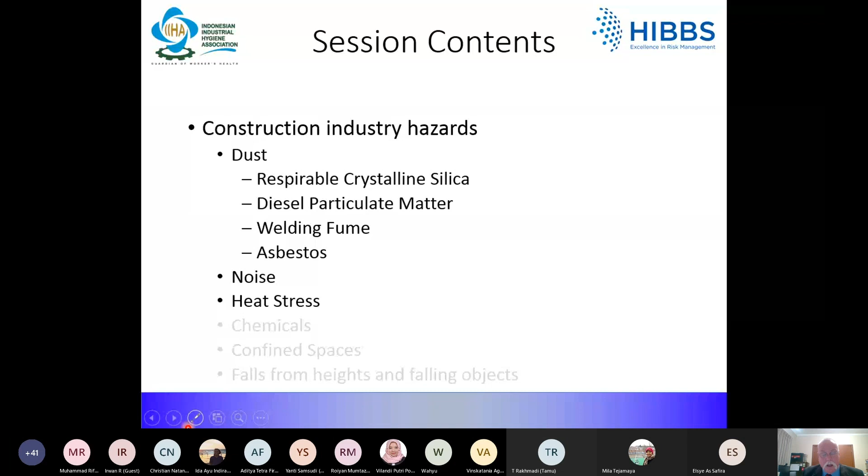So what does the construction industry include? Well, generally we think of building things: standalone houses, residential apartment blocks, commercial buildings, things like multi-storey high-rise blocks, hospitals and schools, or warehousing, or maybe industrial complexes, infrastructure developments, so that's roads and rail networks, bridges and the like.

However, increasingly in our developed cities, before new construction projects can commence, older existing structures have to be demolished. Now, the demolition of older and existing structures has a range of unique occupational hygiene issues to be managed. Now, we won't consider safety aspects of demolition, such as unplanned building collapse or falls or falling objects, but those aspects of the demolition process injurious to worker health.

So things to be considered would be hazardous building materials, so asbestos-containing materials, we'll come back to that later, synthetic or man-made mineral fibre products, electrical components containing classes of compounds such as PCBs, and they're present in light fittings and transformers. There's lead-containing materials, coating systems and paints that contain heavy metal compounds used as dryers or pigments, things like chromium and lead.

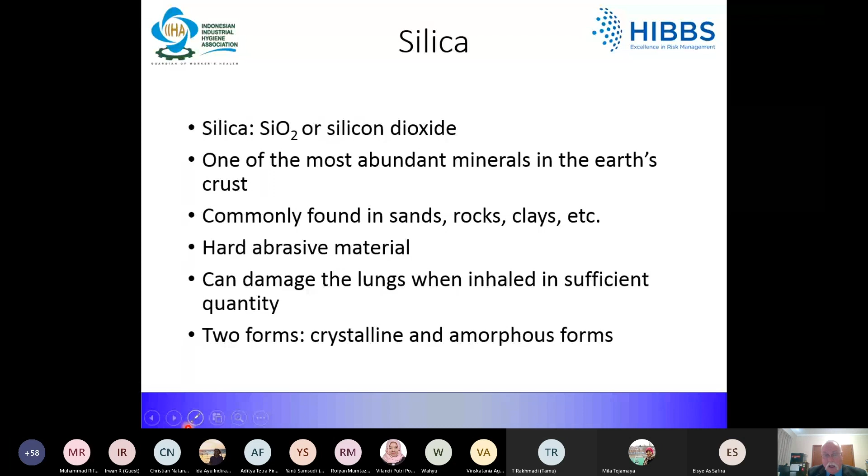Now, silica is also present in two forms. It comes as a crystalline form and an amorphous form. Now, amorphous and crystalline are two states that describe typical solids in chemistry. Solids, hang on, excuse me.

Solids are among the three basic states of matter that include also liquids and gases. Now, solids are characterised by a rigid structure of molecules or ions and atoms that can be arranged in either an ordered or a random, i.e. non-ordered manner. Now, the ordered or random arrangements have led to the categorisation of amorphous and crystalline.

In crystalline solids, the atoms are arranged in an ordered three-dimensional network lattice of uniform intermolecular forces. The atoms are intersected at angles that are characteristic of the crystal, and they are symmetric, they are anisotropic, and they have clear, defined melting points.

So this is here to try and represent an ordered array, regular pattern of atoms in a crystal. And that's your crystal there. Now, a typical crystal you might think of as diamond. That is a network crystal lattice structure.

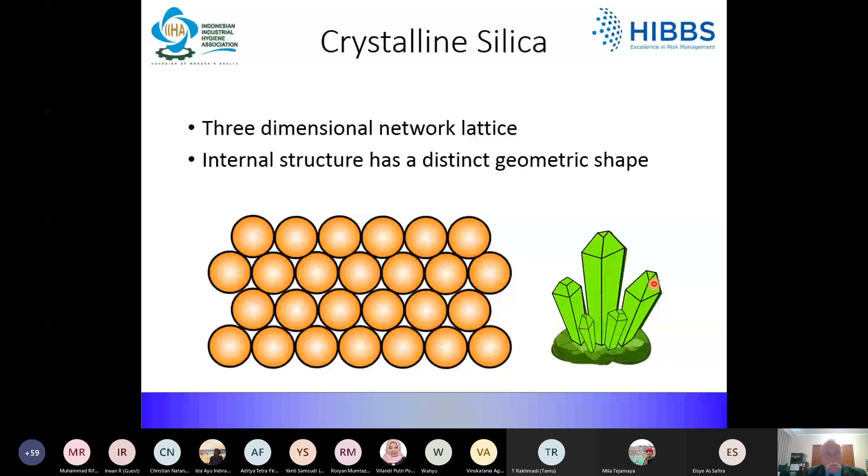Now, on the other hand, amorphous essentially means shapeless. Amorphous solids do not have a defined geometric shape. That is, the arrangement of the atoms is random or irregular, as I've shown you here. There is no regular pattern to that arrangement of atoms. The intermolecular forces are not equal, and the distance between the atoms or the particles varies.

They are generally isotropic and generally don't have a well-defined melting point. And they're also often referred to as supercooled liquids. And the typical amorphous material is glass, common soda glass, like my drinking cup.

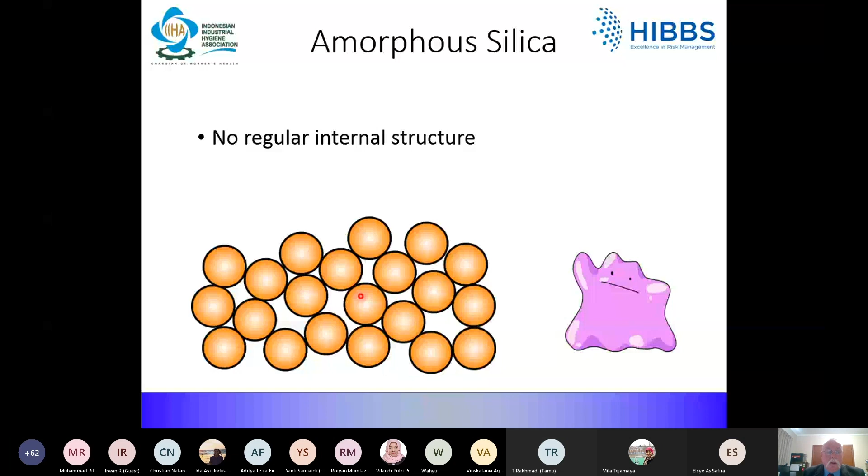Now, crystalline materials can exist in more than one polymorph. Crystal polymorphs essentially have an identical chemical composition, but exist in more than one crystal form. And different polymorphs have different internal crystal structures, they can also have different properties, and they exist in different physical conditions. Crystalline silica has three polymorphs. We've got alpha quartz, cristobalite, and tridymite.

The most common form of silica found in construction sites will be quartz. It's present in soils and rocks, and in building materials including concrete, sand, cement, bricks, and ceramic tiles. In construction, the most common form of crystalline silica is quartz, and it's most unlikely that you will encounter either cristobalite or tridymite.

Now, cristobalite can be found where amorphous forms of silica have been calcined at high temperatures, generally exceeding 1,000 degrees C, and the silica is then converted into cristobalite. And cristobalite is also present in engineered stone. So that's the type of stone that I was talking about previously.

Tridymite can also be formed at very high temperatures, but usually at low pressures and as a byproduct of some chemical processes. I doubt that you will ever encounter it in construction materials.

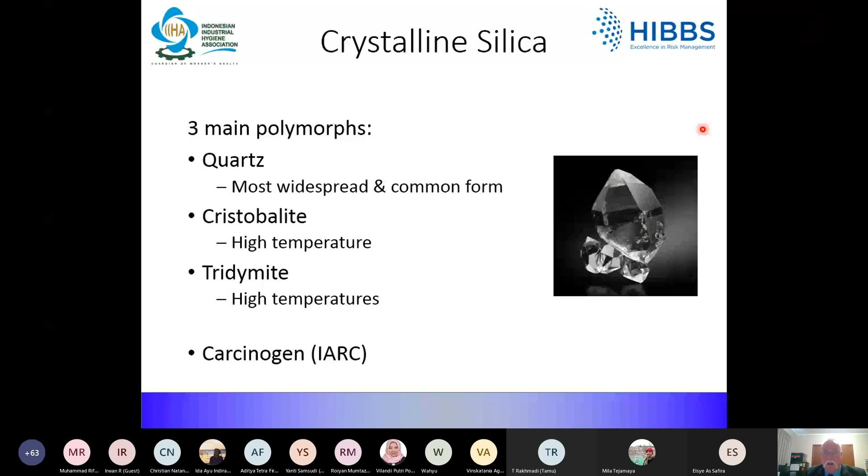Now, all the polymorphs of crystalline silica are classified by the International Agency for Research on Cancer, that's IARC, as Group 1 carcinogens. So, respirable crystalline silica is an inhalation hazard. Inhaled particulate matter that evades interception in the nasal passageway will find its way into the respiratory tract. Particles inhaled into the respiratory tract closely follow movement of the air in which they are suspended.

The behaviour and deposition of these inhaled particles in lung airways is related to their physical characteristics, so that's the size, the density, the shape, and the aerodynamic properties or aerodynamic diameter, as well as the volume and the rate of respiration. So airborne particles of silica in the respirable size range can be inhaled, transported and deposited into the alveolar regions.

And exposure to respirable crystalline silica can result in chronic bronchitis, emphysema, silicosis, kidney damage, and also in scleroderma, which is a disease of the connective tissue of the body. We'll come back to exposure standards shortly.

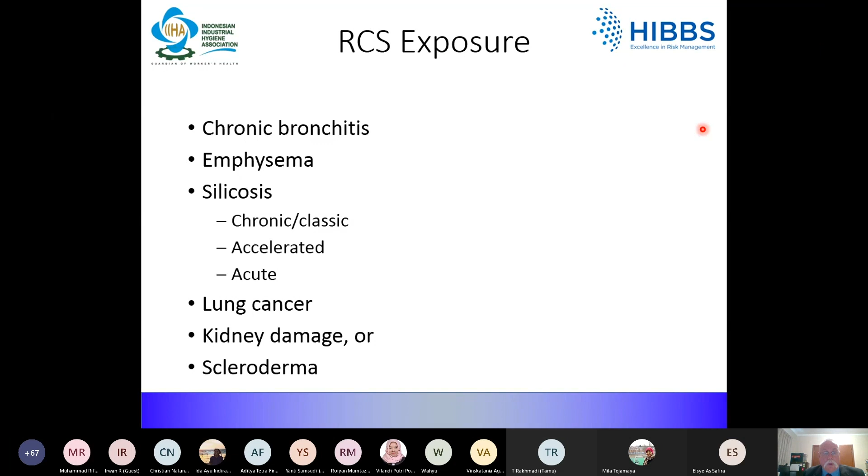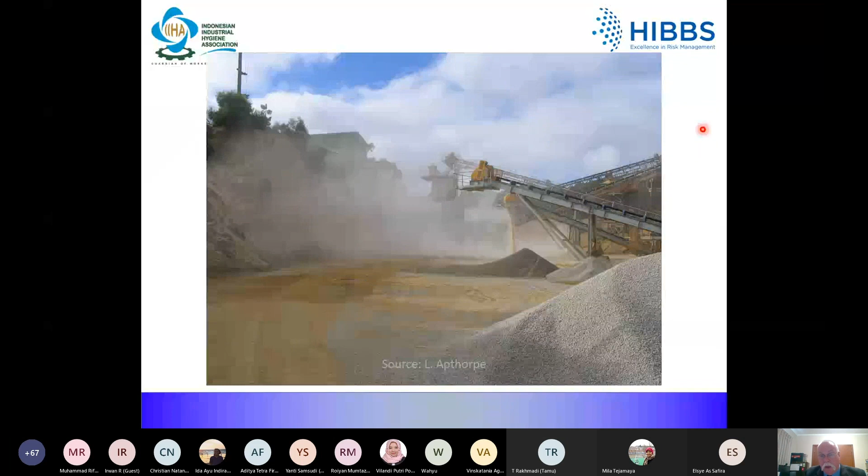Particles that are less than 100 microns in this size range can be inhaled into the respiratory system and are called inhalable particles.

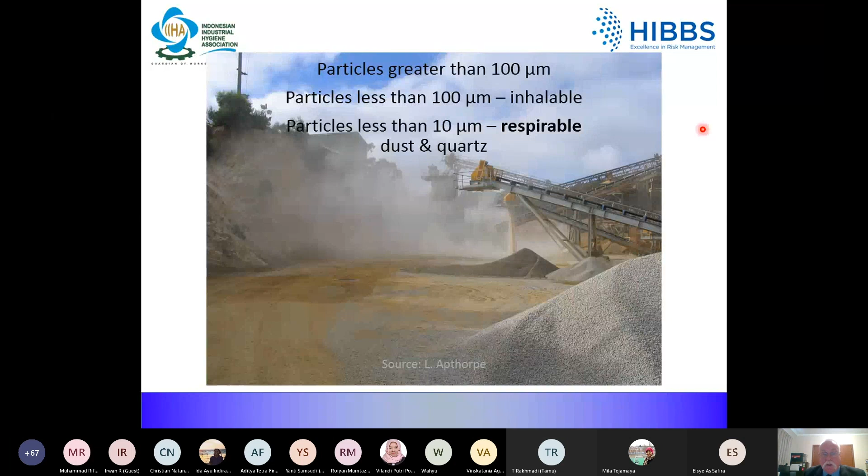The last fraction of this dust cloud are the particles that are less than 10 microns. Particles in this size range can be inhaled. They're referred to as respirable particles, and they can travel down to the alveolar regions of the lungs where gas exchange occurs.

Respirable crystalline silica is too small to be seen by the unaided eye. It's less than a 15th the size of a human hair. And the smaller the size of the dust particle, the longer it can remain suspended in the air.

Airborne respirable crystalline silica can be inhaled and travel through the respiratory tract to the alveolar regions where it is persistent and causes damage. Long-term exposure can result in a series of diseases, including chronic obstructive pulmonary disease, silicosis, and lung cancer. The effects are irreversible and there is no cure.

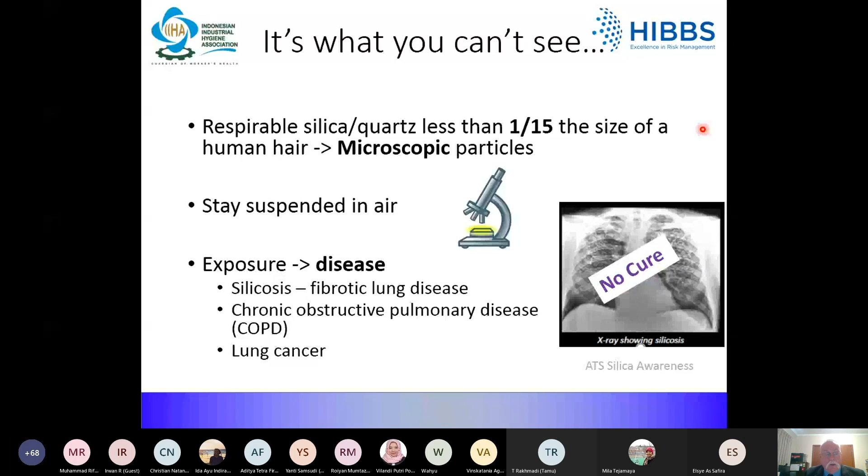So essentially, how much is too much? As for many other hazardous agents, there is a workplace exposure standard for respirable crystalline silica.

This slide shows an Australian 5-cent piece. It's about, should have had one to hold up and show you, but it's about 20 millimetres in diameter, so it's only about that wide.

Up until last year, the 8-hour time-weighted average workplace exposure standard for respirable crystalline silica in Australia was 0.1 milligrams per cubic metre. The blob to the right of the coin is supposed to represent something in the order of about 0.1 milligrams of dust, which is about the size of a match head.

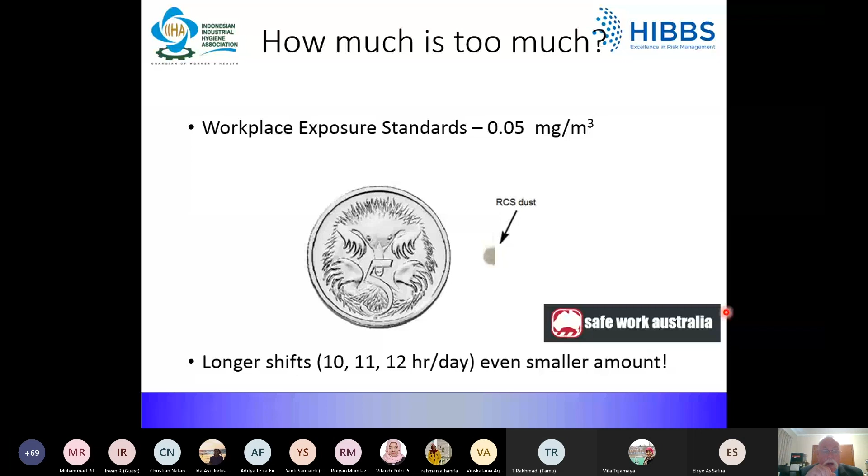I can't remember why I put that slide in now. Look, yeah, I suppose, all right.

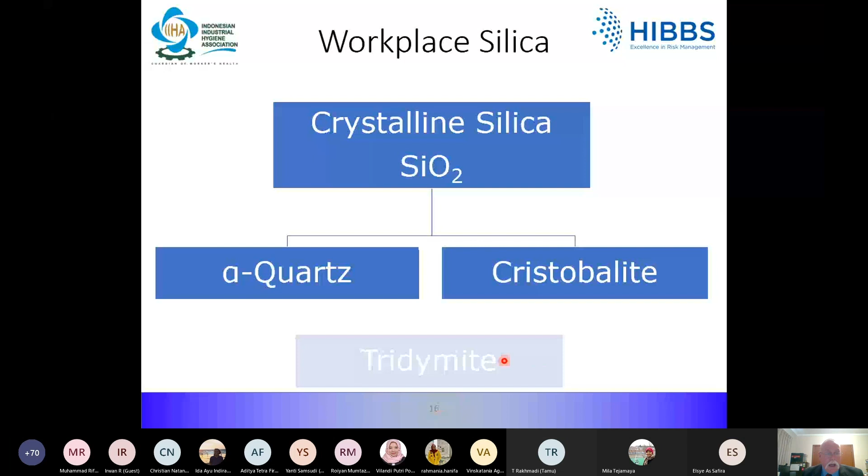We have respirable crystalline silica. Alpha quartz is the most prevalent material you'll come across in the construction industry. Less so cristobalite, although it is present in engineered stone, but I've greyed out tridymite as it's very unlikely that you'll ever come across it.

Now, to estimate exposure to respirable crystalline silica, breathing zone air samples are collected using a size selective sampler. There are various respirable dust size selective samplers available, generally referred to as cyclones, as they operate by employing cyclonic action to separate particles according to their aerodynamic diameters.

The cyclone selected should be capable of sampling airborne dust which meets the sampling efficiency curve for respirable dust, which is the ISO ACGIH respirable fraction curve. Cyclones must be operated within very narrow tolerances of their specified flow rates in order to collect respirable fractions of the dust cloud in accordance with the curve.

In Australia, sampling for respirable dust is performed in accordance with Australian Standard AS 2985, workplace atmospheres method for sampling and gravimetric determination of respirable dust. That's really equivalent to the OSHA, NIOSH, and Health and Safety Executive methods.

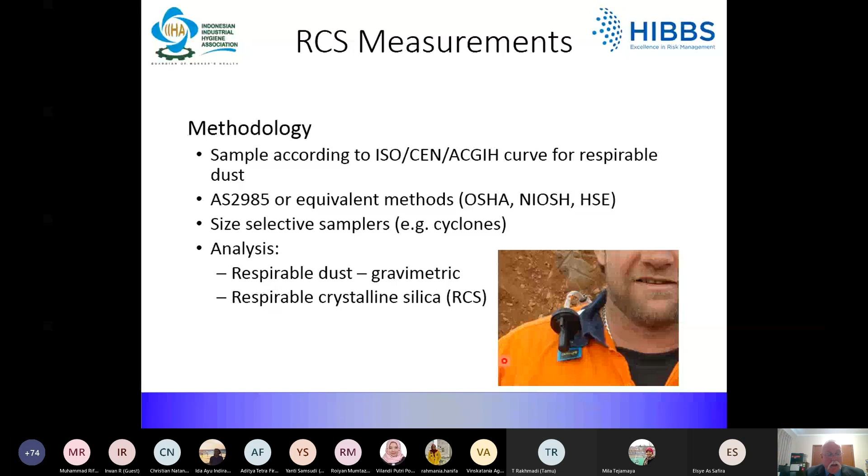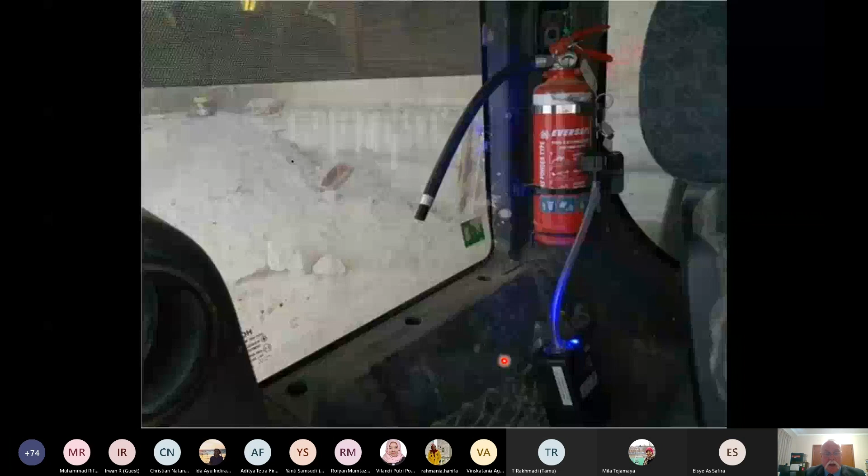Now, this slide has been provided by a colleague of mine, well known to the Indonesian Industrial Hygiene Association, Mr. Brian Eva, who incidentally sent his best wishes as well when I asked if I could use this slide. It's been included to demonstrate the need to seek advice and develop the necessary skills before undertaking any occupational hygiene exposure measurements. This slide was posted on social media to promote the skills of one particular occupational hygienist conducting exposure measurements.

Primarily, the sampler has been located incorrectly. Rather than in the breathing zone, it's actually been sitting in the rear of the cabin, attached to a fire extinguisher.

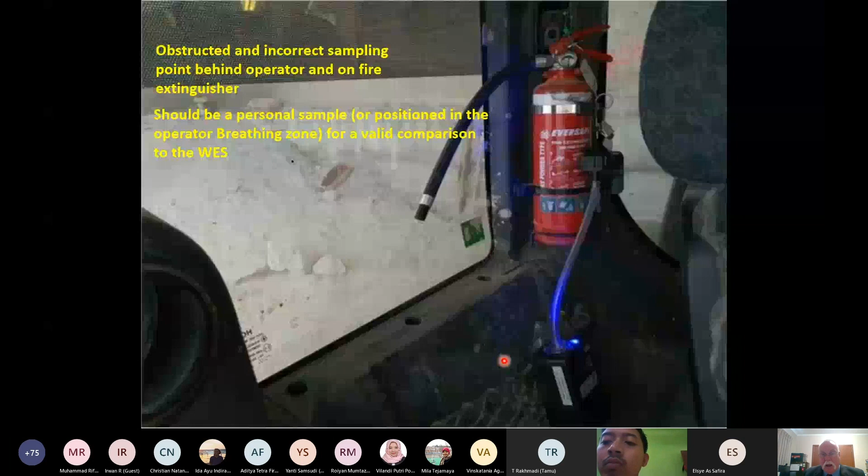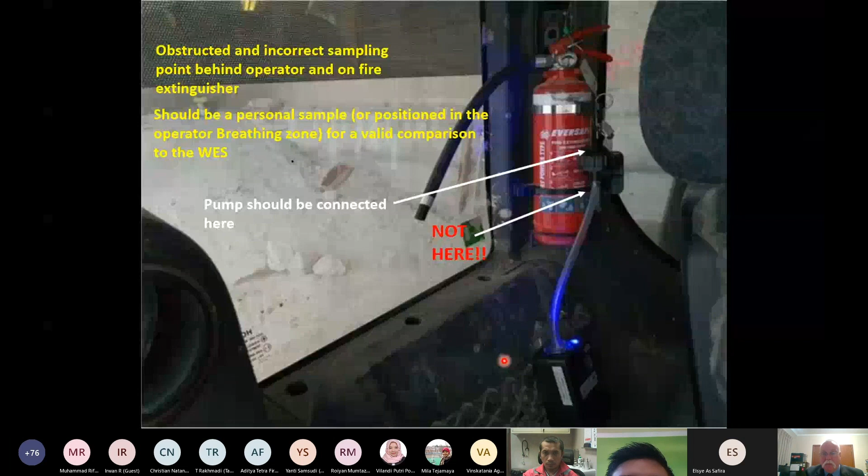To assess the operator's exposure to respirable crystalline silica, which it was purporting to do, the cyclone sampling head needed to be mounted on the operator in his breathing zone, on his collar or lapel. And most disastrously, the sampling pump had been incorrectly connected to the cyclone. Rather than being connected as shown, it's not quite clear from the photograph, but it's been connected to either the grit pot or to the cyclone inlet.

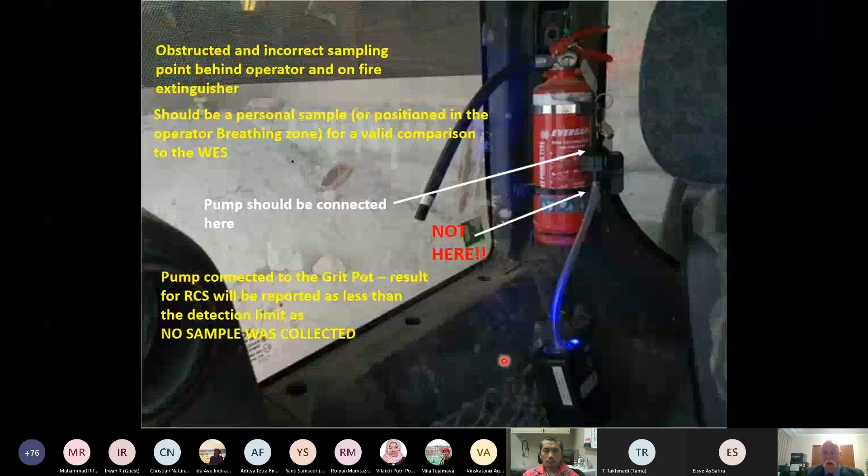Anyway, the result is that the sample was incorrectly collected and should have been voided. The lesson here is if you're going to use a consultant, get an experienced and qualified consultant to conduct your exposure assessments. And if you're in training for a career in occupational hygiene, get a good mentor to assist you in not making disastrous mistakes like this one.

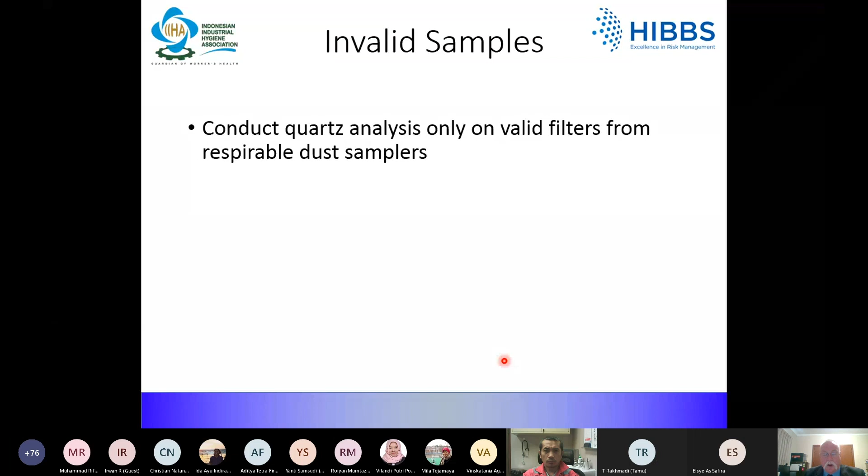It's important that only filters from sampling devices suitable for collecting respirable dust are analysed for respirable quartz. 7-hole samplers and IOM samplers are not suitable for collection of respirable dust samples for quartz analysis. It's also noted that exposure standards for the RCS polymorphs are set for respirable size samplers only and respirable size particles only, and these particular types of samplers do not collect respirable dust—they collect the inspirable fraction.

Additionally, if by chance there is dust on both sides of the filter or on the underside of the filter, the sample needs to be rejected. Apart from the situation outlined in the previous slide, this can occur if the tubing becomes detached from the cyclone and the worker inadvertently reattaches it to the cyclone inlet.

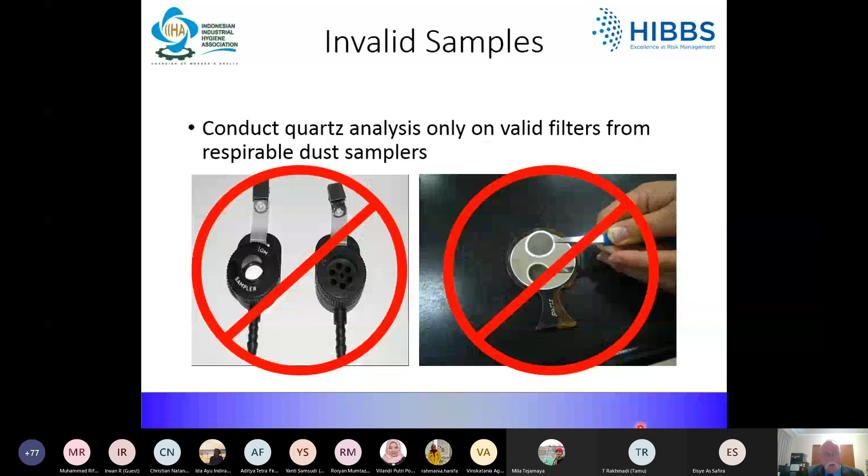There are two primary techniques for analysis of sample filters: the first is Fourier transform infrared spectroscopy, and the second is X-ray diffraction. Infrared spectroscopy exploits the property that molecules, in our case crystals, absorb frequencies that are characteristic of their structure.

These absorptions occur at resonant frequencies associated with stretching or bending of chemical bonds between atoms. The infrared spectrum of a sample is recorded by passing a beam of infrared light through the sample. When the frequency of the infrared beam matches the vibrational frequency of a bond or collection of bonds, they vibrate and absorb energy, producing absorption. Examination of the transmitted infrared light reveals how much energy was absorbed and at what frequency or wavelength.

The absorption frequencies are characteristic of specific molecules or crystals. The amount of infrared light absorbed is proportional to the amount of material present, so we can use it as a quantitative assessment method.

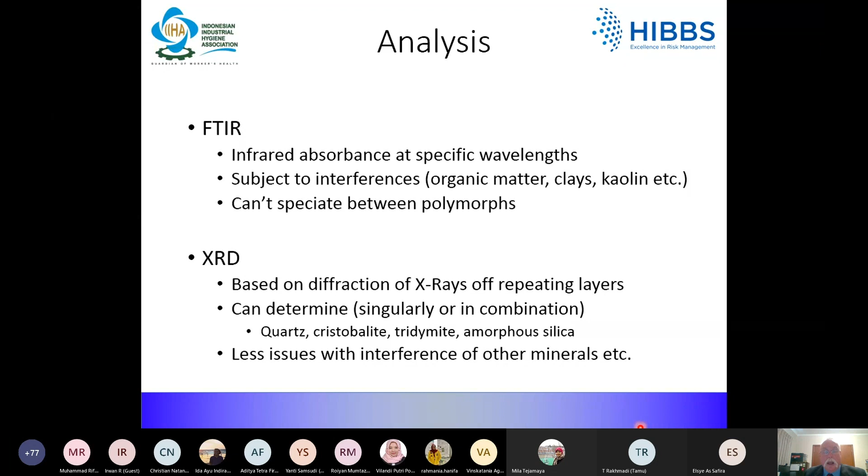X-ray diffraction suffers less from interfering materials than infrared, but its most significant advantage is it can differentiate between the various crystalline silica polymorphs. If you suspect that both quartz and cristobalite polymorphs may be present, then XRD has to be used. FTIR will give you incorrect results.

This table is taken from Safe Work Australia, and it gives an indication of the different types of rock and rock products that contain silica and the quantities present. For granite, you've got 25 to 40%. I've heard and seen different numbers quoted, but this is what's quoted by the Australian regulator. Sandstone, they're talking 67% - that's a very precise figure, but I've heard anything between 50 and 90. Then you've got engineered stones and other composites that contain greater than 90% crystalline silica and a high percentage of cristobalite as well. Concretes, aggregates, and mortars vary depending on the amount of sand content present.

We'll talk a little bit about the Sydney Metro and M5 tunnels. Sydney is essentially underlain by Hawkesbury sandstone that contains a very high percentage of crystalline silica, and the tunnel boring machines have been cutting through this silica for the last 4 years, I think it is.

The Melbourne Metro system, which is the extension of the train system that goes straight under the centre of the city of Melbourne, is about 50% of the way through its work, and it's cutting through what they refer to as the Melbourne Formation, which is a shale silt formation that contains a relatively high percentage of crystalline silica too. Not as high as Hawkesbury sandstone, but it is still relatively high.

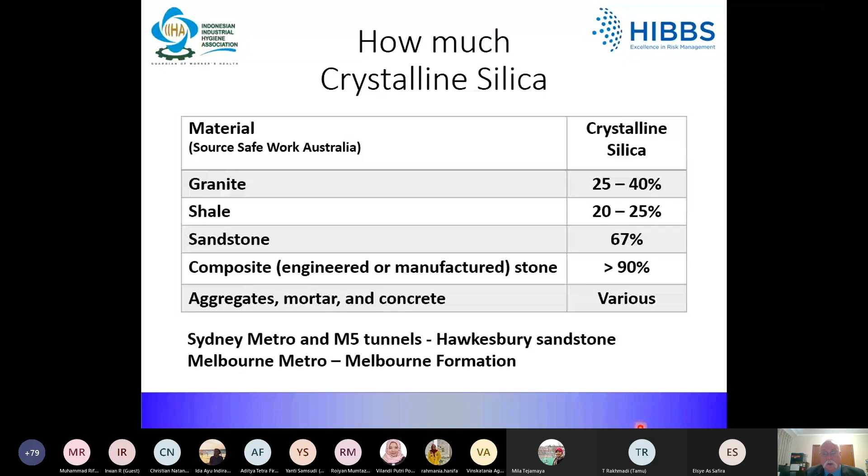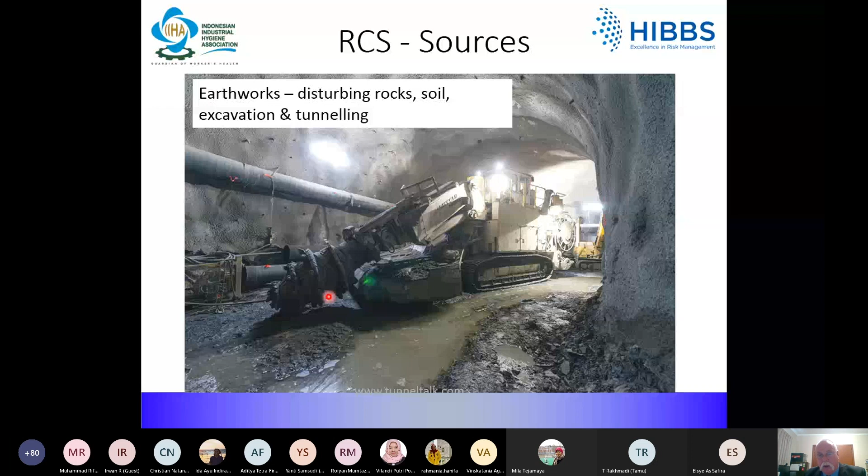So we've got a few pictures to show you. This is a road header in the Sydney Metro system. This rotates - actually, I'll show you that it's better in the next slide. You can see that the cutting head rotates and cuts through the stone or the clay or whatever it might be that's ahead of it.

Earthworks, transferring rock and spoil and other materials and sand into trucks for transport - it's a source of silica. Shotcreting, where you're spraying concrete onto other surfaces, even though it's done as a wet process, has the ability to release quite significant concentrations of crystalline silica.

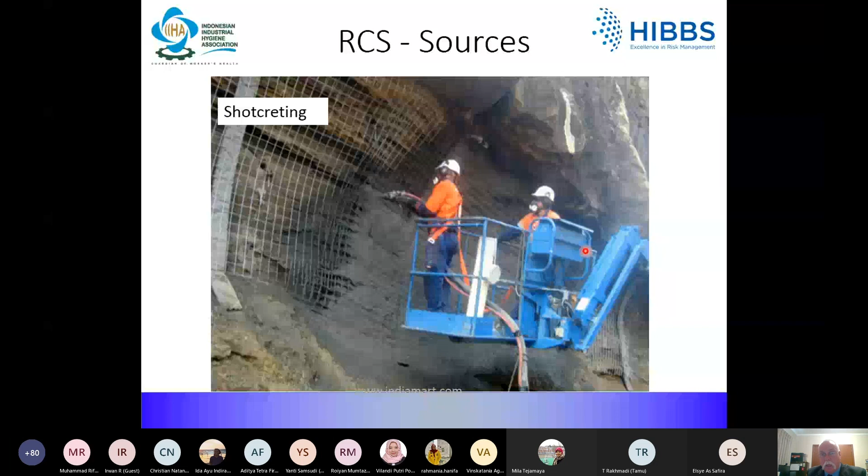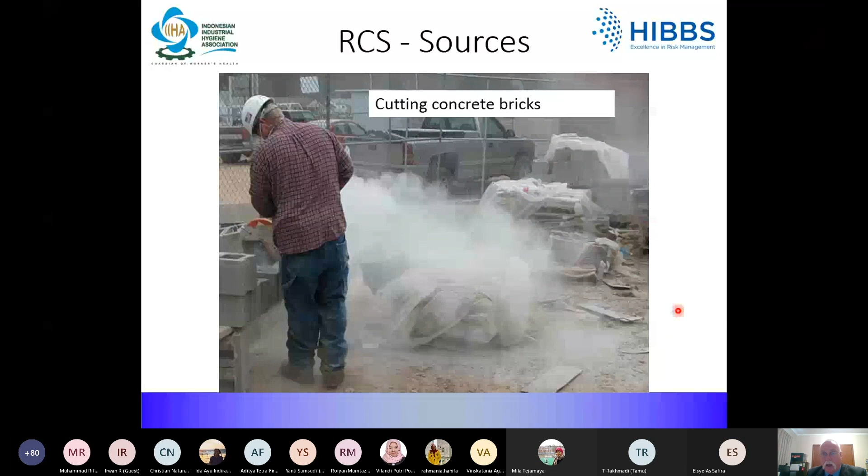You can see this bloke, he's cutting concrete bricks. There is no ventilation, no exhaust ventilation and no wet work, and he's generating quite significantly high concentrations of dust, which will be high in crystalline silica.

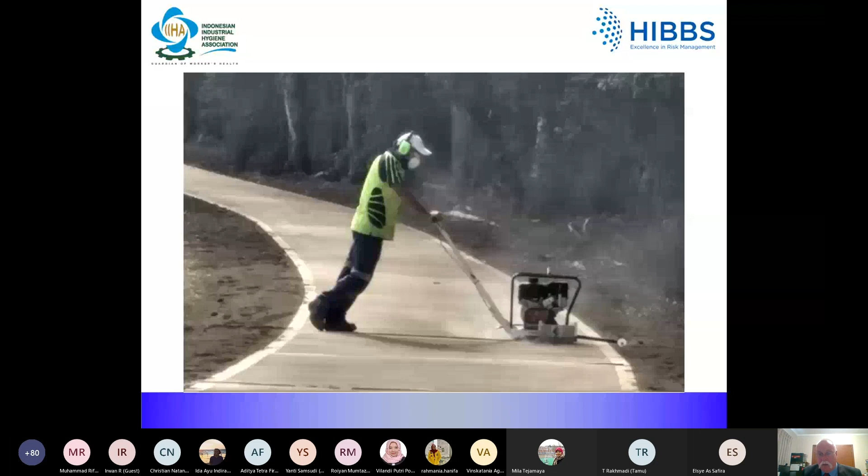There is grinding of concrete surfaces. This bloke's grinding down a section of footpath, because the heights of the footpath have moved so that the heights are different.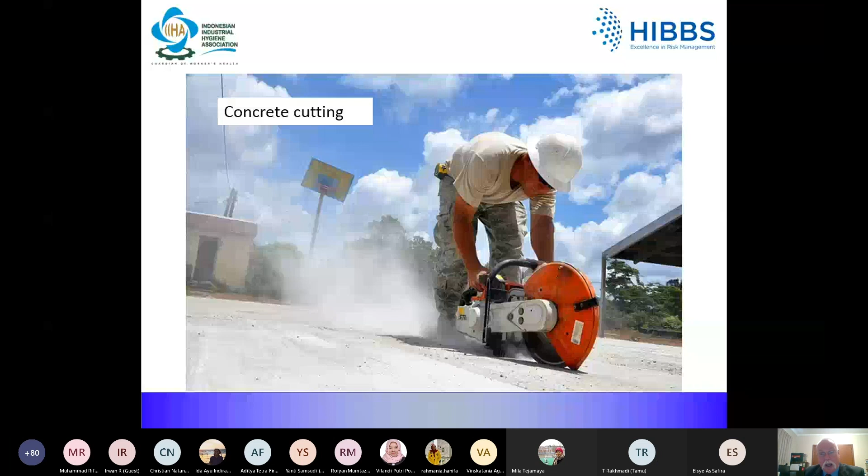The laying of brick paving can also release significant levels - probably not as high as the other operations, but it can release respirable crystalline silica.

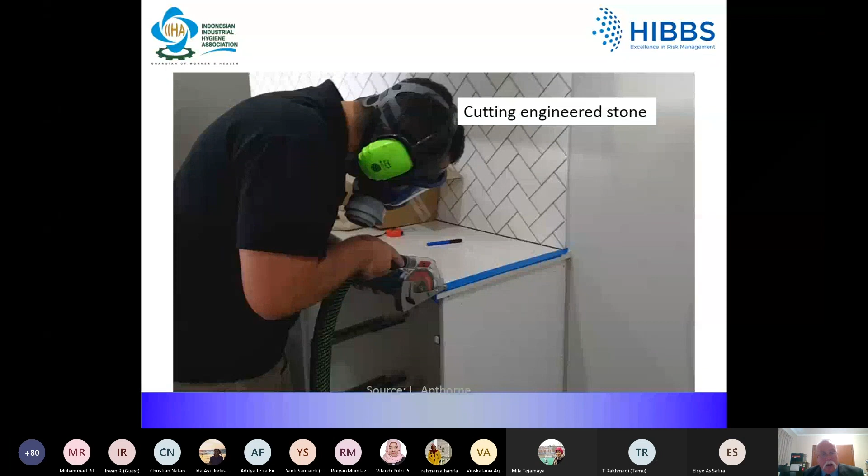The cutting of engineered stone has really been a tragedy in Australia, because the engineered stone industry employs generally migrant workers, and there was little consideration given to the high levels of crystalline silica in the actual engineered stone, as it can be up to 90%. The cutting, grinding and polishing of it releases quite significant quantities of RCS, and that has resulted in a significant outbreak in Australia amongst these trades of acute silicosis. As I said before, it has tragically led to premature deaths - and when I say premature, I mean very premature. Men in their 20s, 30s and 40s have died as a result of this exposure.

So what are we going to do about controlling exposure to RCS? The controlling of exposure essentially should focus on minimising dust generation through the use of dust suppression or on-tool exhaust ventilation. You can utilise wet cutting or water or wetting down of the material.

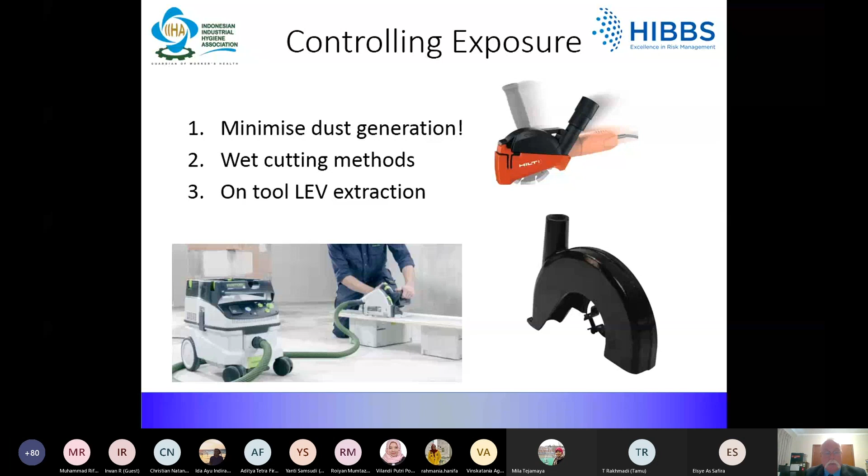If you're going to use water, it's important to clean up after using wet techniques to ensure that residues containing RCS are not left on the ground to dry out and then be disturbed and become airborne later, leading to exposure of unsuspecting people.

Now, controls can include both systematic and individual options. Systematic controls focus on control at sources or suppression of dust. Individual controls are those implemented on a personal basis by the worker.

Keeping the work area clean is important, and always avoid dry sweeping, as this generates significant levels of airborne dust. And if silica is present, significant levels of RCS exposure can occur. Wet sweeping, washing down, or vacuum cleaning methods should be favoured over dry sweeping. And if you're going to use a vacuum cleaner, it needs to be fitted with a high efficiency particulate air exhaust filter.

The cabins of heavy plant and equipment should be sealed and ventilated with filtered air to prevent the ingress of dust and RCS. Now, it's inevitable that mud and dirt will be walked into equipment cabins, and consequently the cabins need to be cleaned on a regular basis to avoid the mud drying out and then being disturbed and becoming airborne.

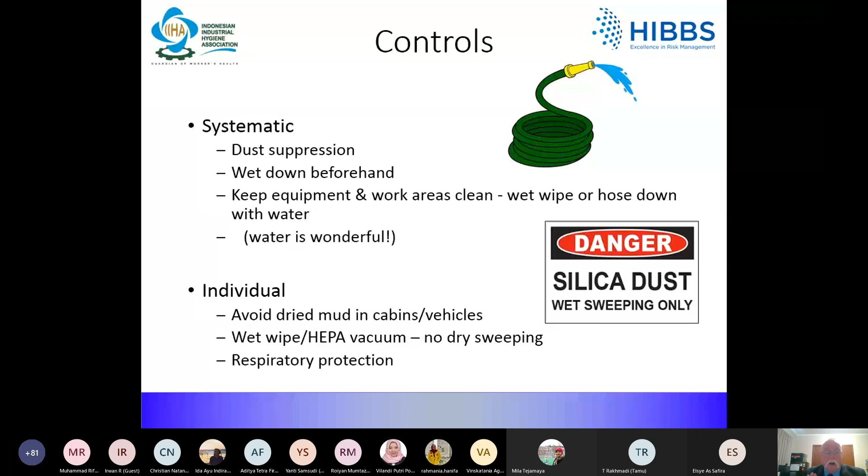When higher order controls are not available or do not provide an adequate level of protection, then we resort to the use of respiratory protective equipment. It's a final resort, if you remember back to the hierarchy of controls - we'll talk about that in a bit more in a minute. Often on construction projects, the use of respiratory protective equipment is necessary, as the higher order controls are either not available or don't provide sufficient protection.

So as this slide shows, please avoid dry sweeping and clean up mud before it dries.

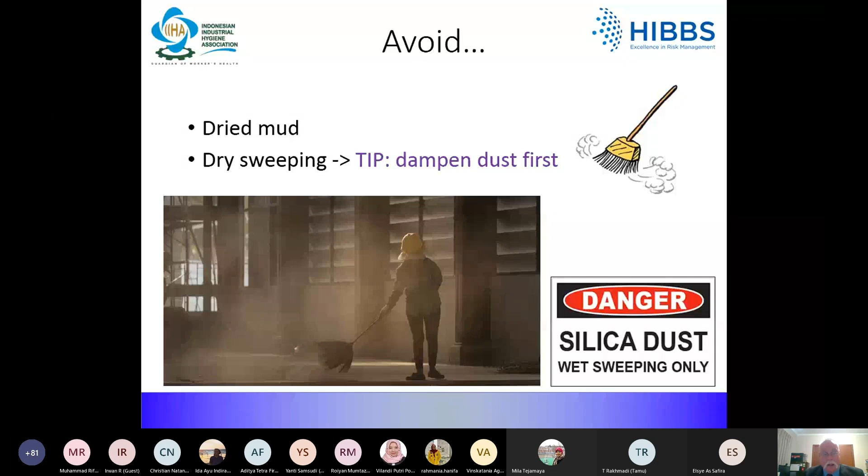Now, I've got a couple of short film clips and I hope these work all right, but we'll see what happens. This one shows, I took this the other day walking down through the centre of Melbourne, and it shows the guy - these are not bricks, they're actually tiles that are glued onto the outside of these concrete columns, and he's about to start cutting some here.

Now you can see that's actually quite a noisy process. He's using an angle grinder, he's using it dry. He's not wearing a respirator and he's not wearing any hearing protection, and the people walking down the street are getting showered with dust that contains crystalline silica as well.

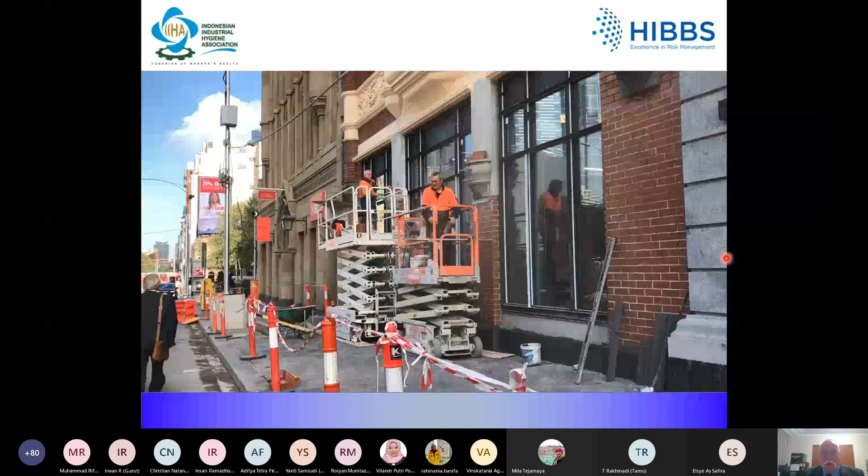There's another shot in the centre of Melbourne that I took about three weeks ago when I was walking down the street, and this is a machine that is scabbling the surface of the road in preparation for the laying of a new bitumen surface.

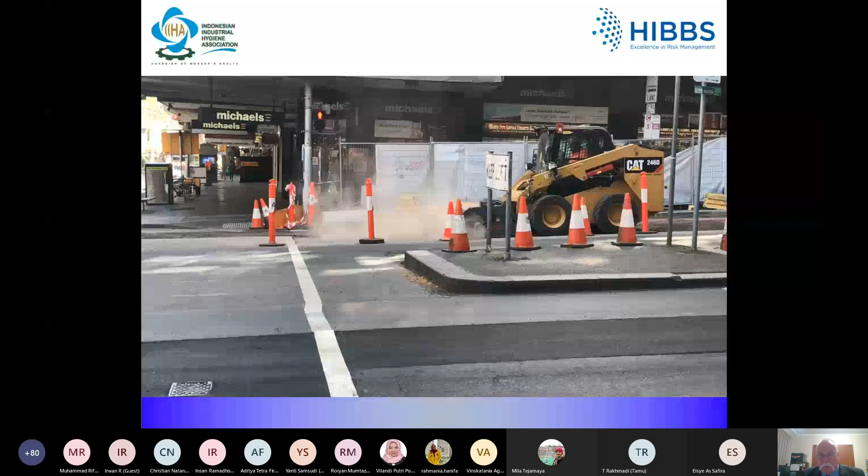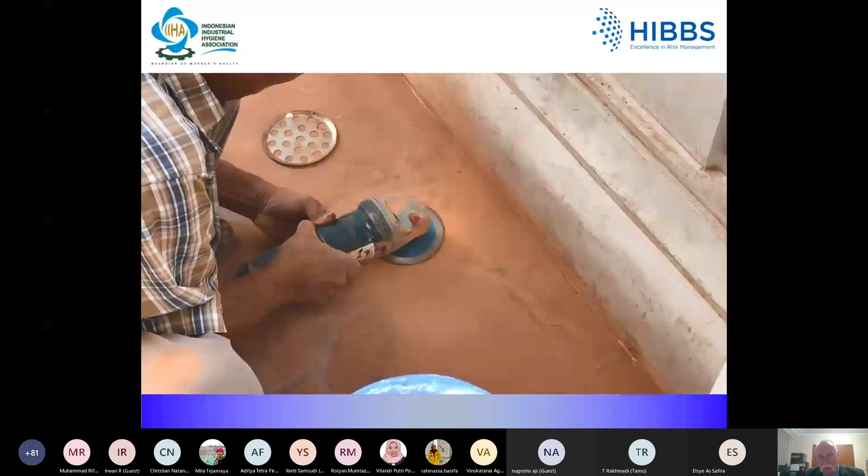Now, I don't know how well those film clips worked over the internet, but you can see that all three of them had quite significant quantities of dust being generated, and they were being generated from mechanical actions on materials that contain relatively high levels of crystalline silica. So you would expect or anticipate that the levels of respirable crystalline silica being generated were quite significant.

In addition to the dust being generated, the tool in this case is not fitted with any guard. So if he has an accident, he could slice a finger off. The gentleman's not wearing a respirator. I don't know if you noticed at the outset when it focused on his head, he has no hearing protection on either.

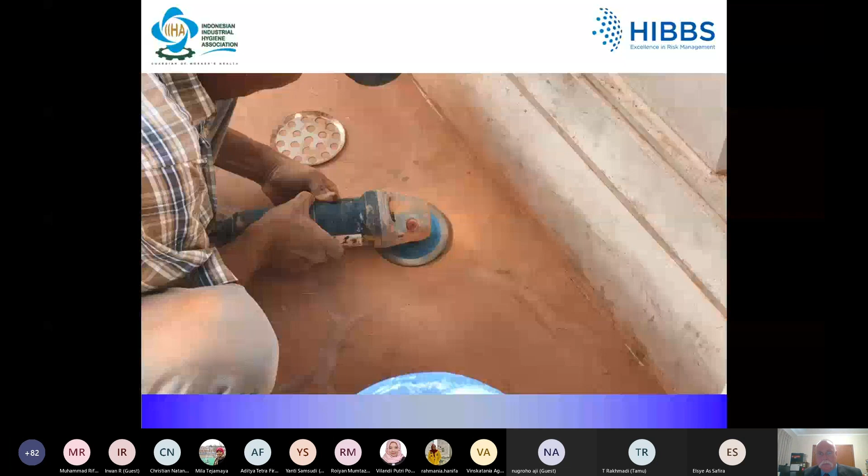So now the hierarchy of controls in descending order is right now elimination, substitution, engineering controls, administrative controls, and then essentially as a last resort, the use of personal protective equipment. Now, on construction projects, the use of respiratory protective equipment is often generally necessary, as higher order controls are either not available or they're not sufficiently protective.

Now, for respiratory protective equipment to be effective, it needs to be the appropriate respirator for starters, for the type of hazard. It needs to be worn at all times, and it needs to be worn correctly. Now, if respirators are not correctly fitted and worn, they will be ineffective in protecting against the hazard.

For airborne dusts in the construction industry, Class P2 respirators are generally recommended. Now, the respirators can either be a reusable type or a disposable type, depending on the level of protection that's required. Tight-fitting respirators rely on a good seal between the skin on the face and the respirator that's in contact with the skin. That requires the subject to be clean shaven.

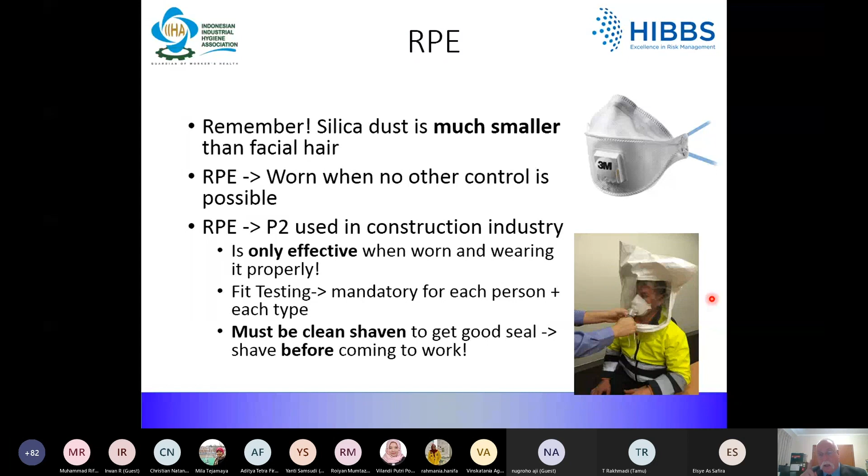To test the efficiency of the respirator, the subject should be fit tested annually, and that's what we're showing here. This is a qualitative fit test, not quantitative in this case. Now, as much as anything, the confirmatory test or the fit test shows the subject how important it is to be clean shaven and how important it is to correctly fit the respirator.

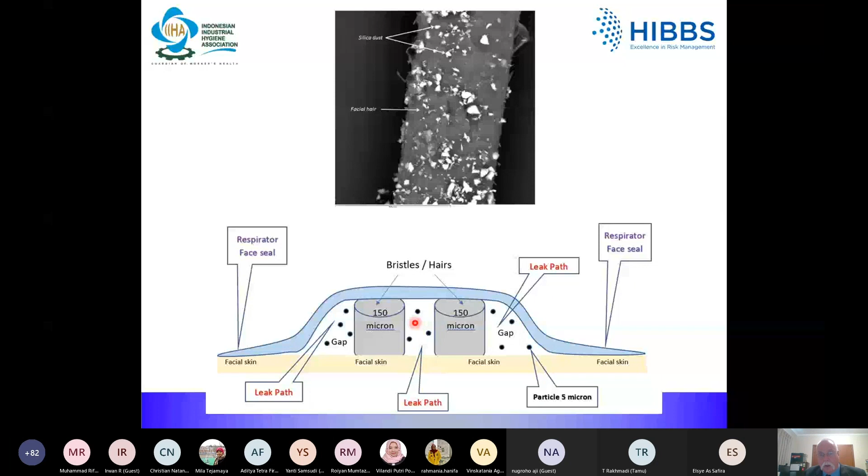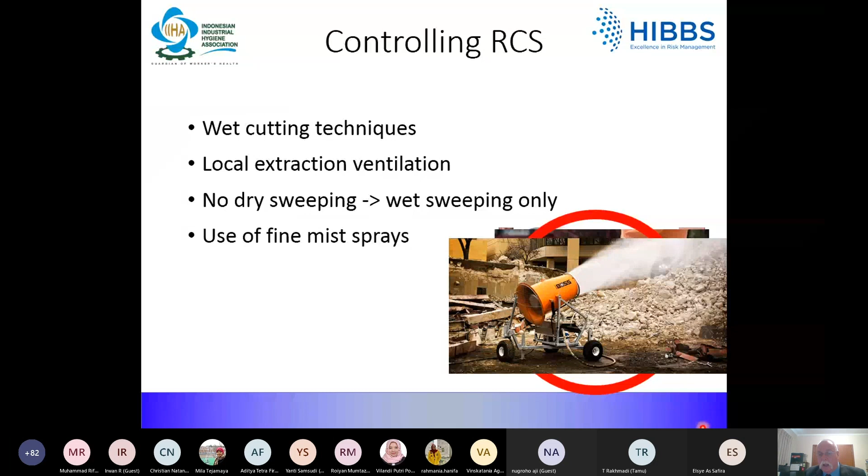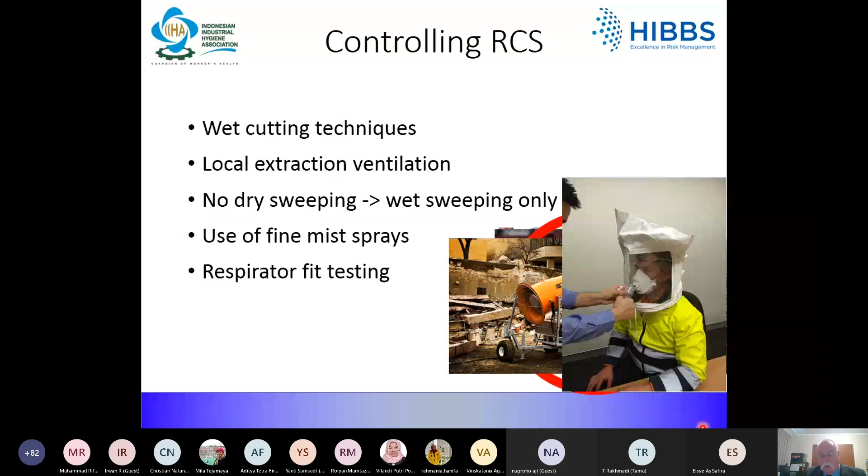So this is a bit of a summary page of the previous section. Controlling with wet cutting, on-tool local extraction ventilation, avoid dry sweeping, better to use wet sweeping or vacuuming techniques, the use of fine mist sprays to wet things down when materials are being disturbed, respirator fit testing to ensure that you're getting adequate protection, but also to teach the subject the importance of being clean shaven and correctly fitting the respirator, and then a clean shaven policy.

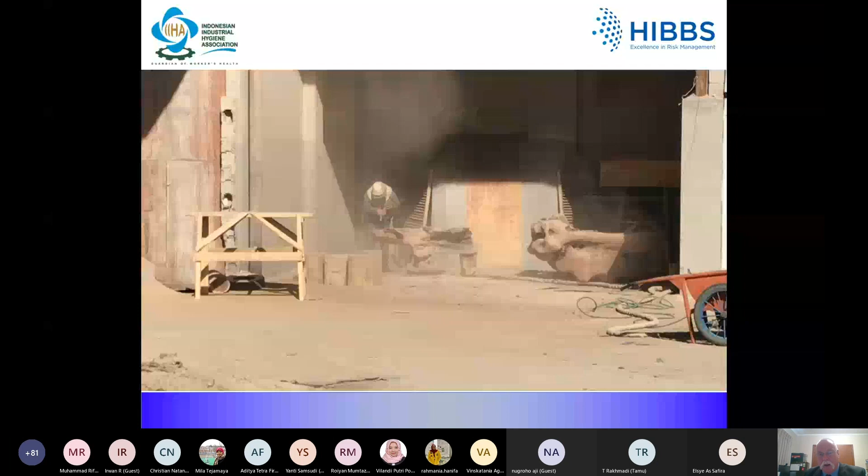Now, I wanted to include this one. I shot this in China at the beginning of 2019 at a stoneworking facility where they create the most amazing sculptures, and they finish them off by sandblasting them, and it is sand. Even though the guy's got an air wash hood on, he's in a separate area blasting away at the surface, but the dust is coming out of the area and wafting straight back into the area where the unprotected people are working.

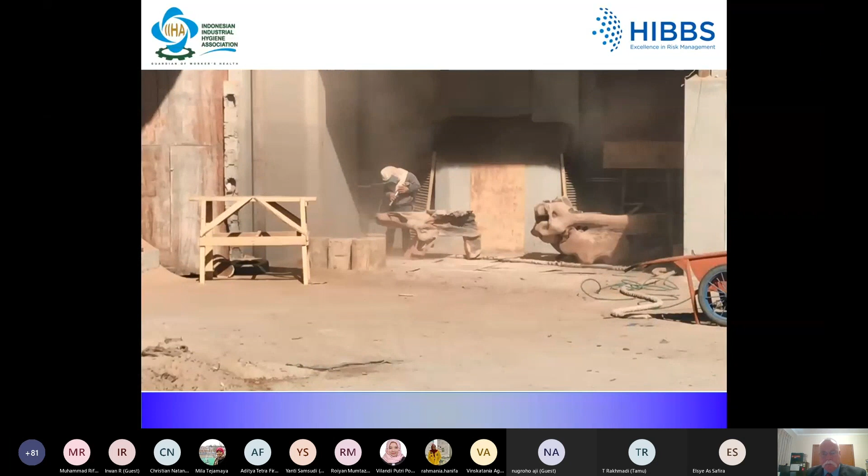So, I'm about 30 metres away, and you can hear that it's really quite loud, and that was a really loud process. But it was generating really significant quantities of dust that were blowing out from where he was working and straight back into an area where unprotected people were working.

Now, I thought we might spend just a minute talking about the UK Breathe Freely program. It is aimed at reducing occupational lung disease, which causes significant debilitating ill health and an estimated 13,000 deaths per year in the UK. The BOHS initiative was launched in 2015 and has been highly successful in providing education and awareness of safe work practices and resources to control exposures.

The resources are available online to both workers and employers, and anybody globally can log on and download the material. The BOHS has very generously also permitted other countries like AIOH and NZOHS to utilise their resources. So it may be something that IIHA may want to consider as well.

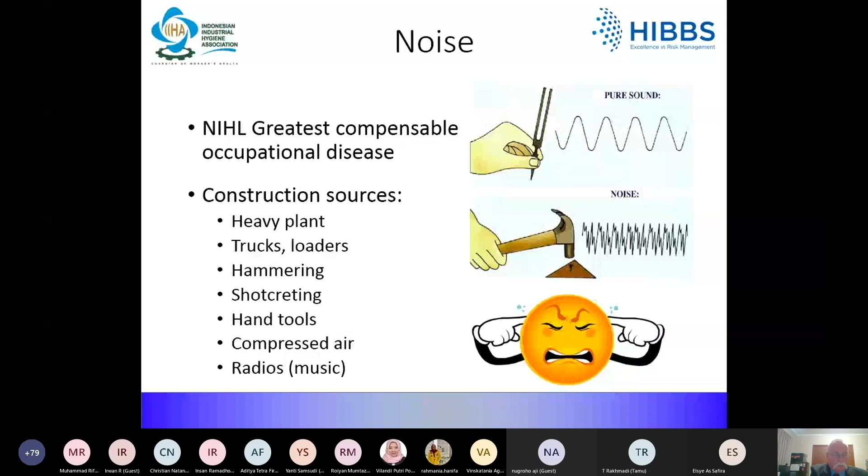Now, noise sources can be both task-based, so that's tools used by the worker, or constant and varying, so that's background noise, boom boxes, etc. Now, noise surveys, so that's a point and shoot with the sound level meter, is useful to identify noise sources and delineate hearing protection zones. But noise dosimetry is required to assess personal noise exposure. And my apologies again, but I've only got the Australian limits for occupational noise.

But in Australia, the LAeq 8-hour time-weighted average is 85 dBA, and it's obviously lower for longer shift durations. And the LC peak is 140 dB instantaneous. Now, Elsye or Mila, look, I'm sorry that I haven't quoted the Indonesian ones, but are they the same or similar? Yeah, we have the same daily limit.

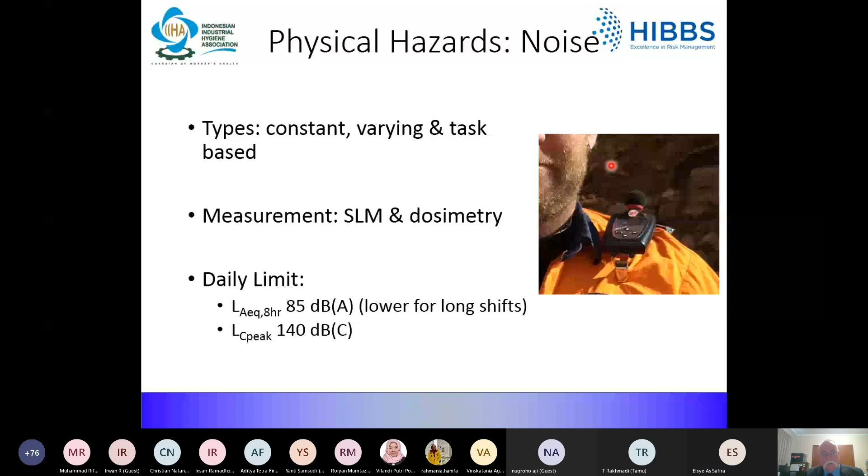Now, again, using the hierarchy of controls to control noise and noise exposure on construction sites is problematic, as eliminating or controlling or reducing noise at source is generally impossible. Commonly, hearing protective devices are used to address constant and task-based noise on construction sites. My observation is that on construction sites here, most workers have a very cavalier attitude to the use of personal protective equipment, in particular hearing protective devices, and consequently hearing protection programs in Australia that rely on the use of hearing protective devices have met with very, very mixed success.

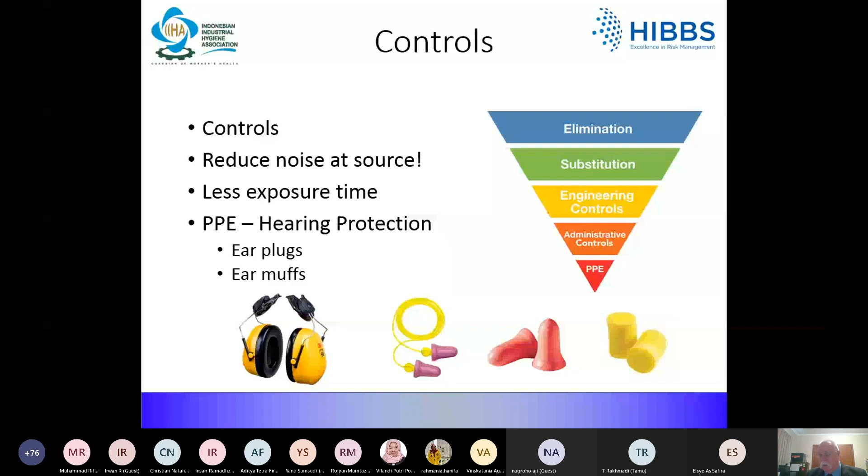I just wanted to talk about correct and incorrect fitting of earplugs. Most people on construction sites haven't been shown how to correctly fit the things, and they just try and shove it straight in their ear canal, and they're poking out like this, and they're offering very, very little protection. They need to be carefully rolled down, the pinna pulled backwards and then shoved into the ear so that they sit right inside the ear canal, where they swell up and seal off the ear canal.

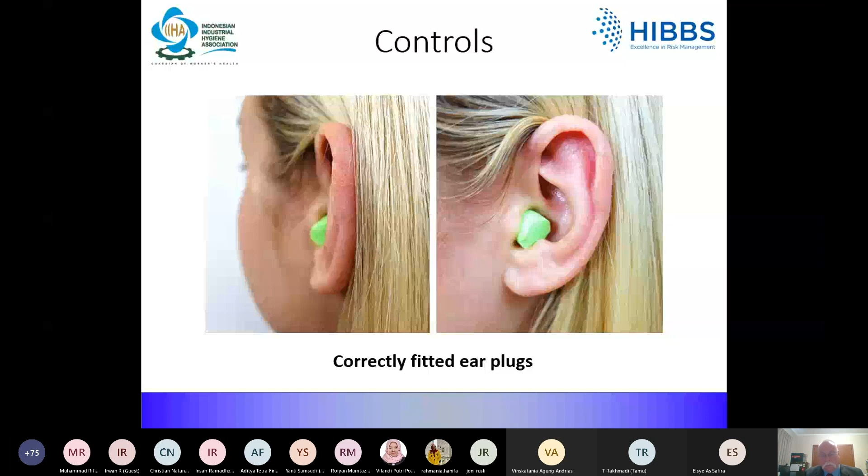Actually, I'm just noting the time, and I've gone over time, or I'm about to go over time.

So we'll quickly talk about diesel emissions. Most heavy machinery used on construction sites is powered by compression ignition engines, or referred to as diesel engines. Now, diesel exhaust has both gaseous phases and diesel particulate matter. The gaseous phases can include things like carbon monoxide, unburned fuel, and oxides of nitrogen and lesser oxides of sulfur compounds. Diesel particulate matter is comprised of the burnt component of it, and we measure it as elemental carbon.

The exposure standard, it's actually a guideline. It's not a fixed standard as such, but the guideline is 0.1 milligrams per cubic metre measured as elemental carbon. So there are a number of controls. The most important thing is engine maintenance. The engine needs to be tuned so that it reduces the amount of diesel emission. And the exhausts can be fitted with scrubbers or filters.

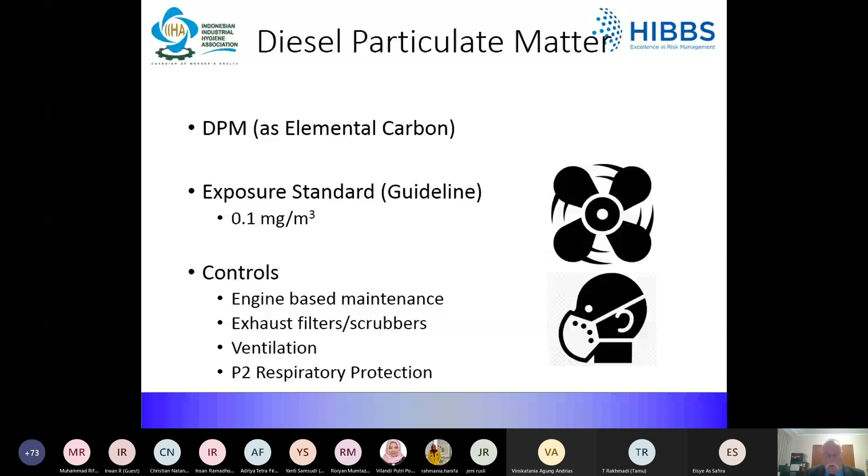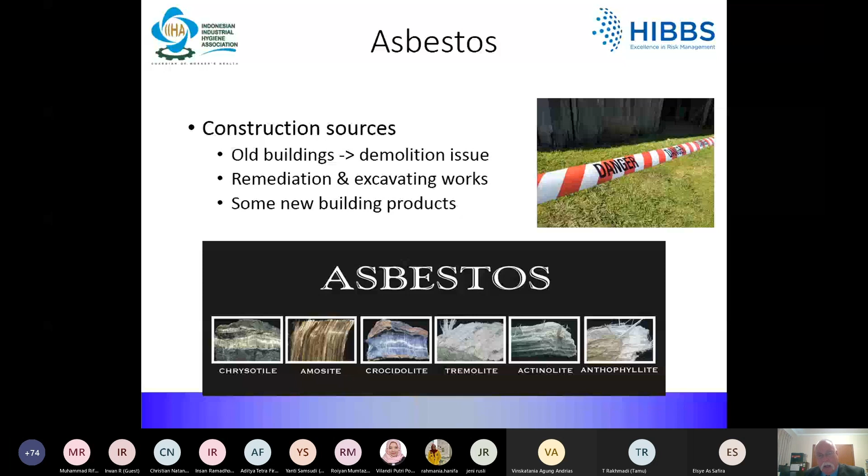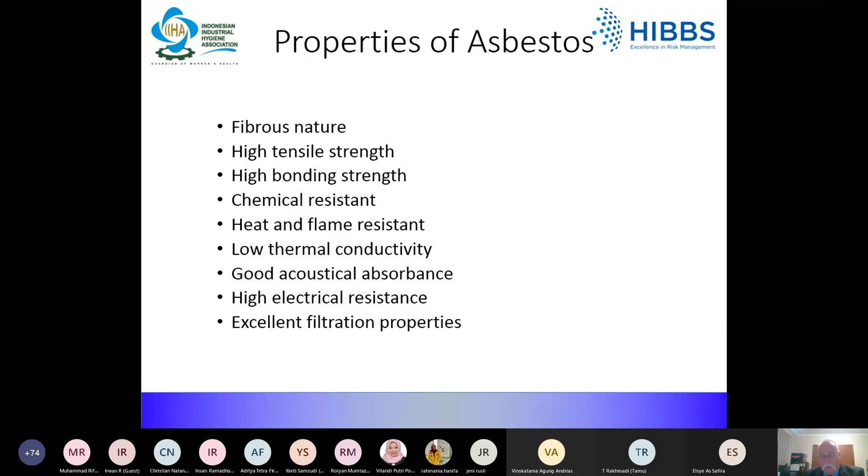So the typical uses in the construction industry are as cementitious construction materials. It was used extensively in fireproofing, thermal and acoustic insulation. It was woven into fabrics and ropes. It was used as binders or fillers and extenders in other products. It's used in friction materials, and because of its high electrical resistance and its resistance to fire, it was used in electrical equipment. And there have been many thousands of products manufactured using asbestos.

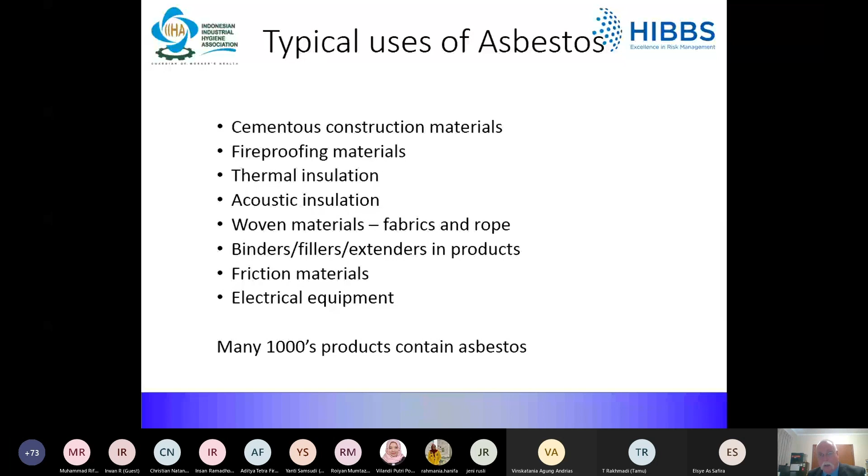It comes in two different types of products. They're referred to as friable and non-friable. Friable materials, it's actually a definition, and it's a very poor definition, but what it is, it can be crushed down to powder between your fingers when it's dry. But essentially what it means is that it's a material that is easily disturbed, and when it is disturbed can liberate quite significant quantities of airborne respirable fibres.

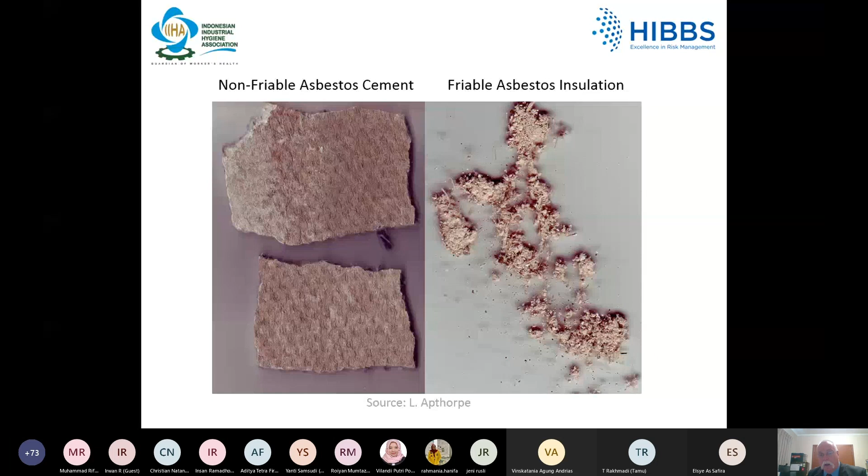Non-friable materials, on the other hand, there's generally less asbestos in the material. It's bonded into the matrix, and it requires significant disturbance to liberate airborne fibres. If you think about things like asbestos cement sheet, the only way that you can liberate fibres from that is by disrupting the matrix by running a power saw through it or something like that. So on the left, you've got non-friable fragments of asbestos cement, and on the right, you've got friable asbestos insulation.

So the health effects result from the inhalation of respirable fibres. And the respirable size range for fibres, not just asbestos, is different to other dusts that are spherical in nature. Because of the nature of asbestos, when the fibres are ruptured, they split along the length of the fibre and produce long rectilinear fibres that are very, very fine in diameter.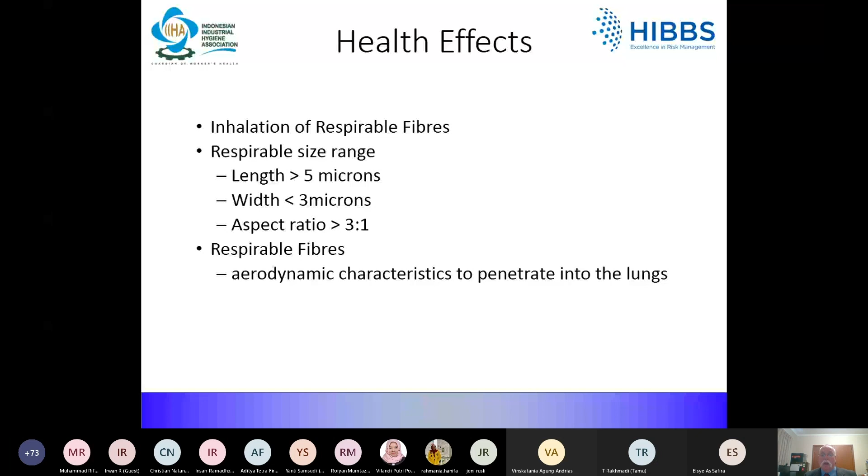So respirable size range is defined as those fibres that are greater than 5 microns in length, less than 3 microns in diameter, and have a length to width ratio that's greater than 3 to 1. And it's fibres in that size range that possess the aerodynamic characteristics that allow them to penetrate down to the gas exchange or the alveolar regions of the lungs.

Now I've remembered.

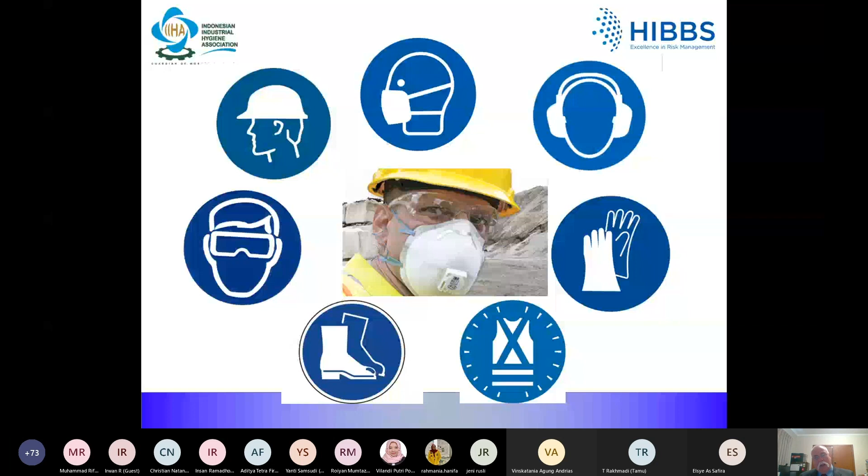So we've got this gentleman wearing personal protective equipment, a respirator, glasses. He hasn't got any hearing protection on, so I hope he's not doing anything noisy, and a hard hat. So these are typically the types of personal protective equipment that you will be utilising on a construction site.

I was going to talk a little bit about heat stress, but I've now gone significantly over time. I was actually told 45 minutes, and that was extended to an hour. So we could probably call it quits at that point.

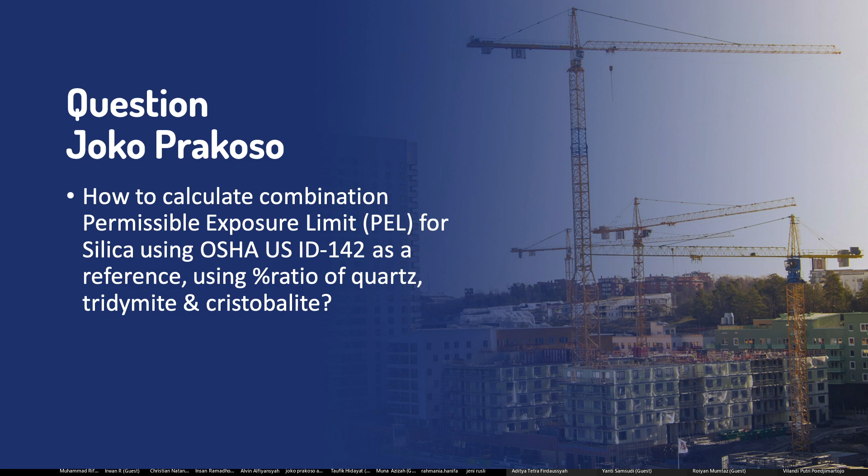Look, I'm not. What I will do is, for those questions, and I apologise if I can't answer them straight up, those questions that I am not able to answer straight up, if you could put them in a list and email them to me, then I would be very happy to do the research and provide an answer in a week or two.

Okay, I will send you the question, but I think OSHA 142 actually put the calculation method in the document. So I will check with Pak Joko again the specific question for you. Yeah, look, if you can send it through, I'll have a look at it, and then I'll respond as soon as I can.

The second question comes from Mbak Maria. She's asking about the control measures for blasting activity in a confined space. The current control measure in her workplace is that the blasting operators wear supplied air respirators, while the other workers in the surrounding area only wear half mask respirators.

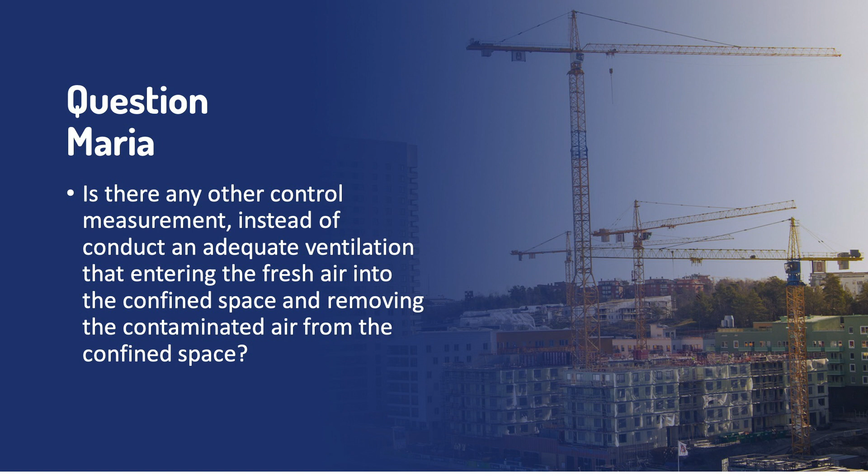The other control measure is providing adequate ventilation into the confined space. So do you think it is an adequate or sufficient control measure? Look, that's a very open-ended question. It's a little hard to answer.

We're involved in similar work on both the Sydney Metro system and the M5 East, although the Sydney Metro work's been drawing to a close. Essentially, we were providing on-tool extraction ventilation where possible, but that's often not possible on large construction equipment. So we were providing extraction ventilation to the surface through a scrubber, and then supplied air ventilation

down to the work face as close as we could get it, and then separating the areas where those dust generating activities were occurring from other locations by installing brattice curtains to isolate the area with the high dust load.

And then the workers were either working inside airtight cabins fitted with filtered supplied air, or they were wearing respiratory protective equipment adequate for the level of exposure. In some cases airline respirators, in other cases PAPRs. So I hope that answers the question. If you need further detail, as I said, I'm happy to write back. Okay, thank you, Phil.

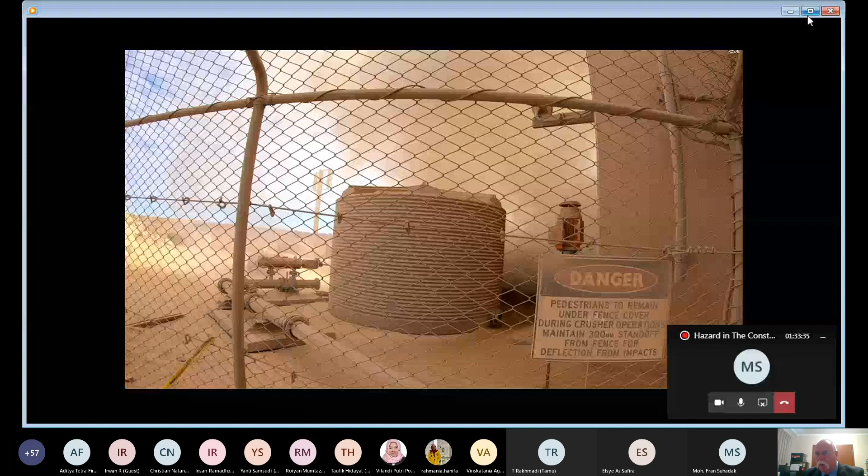This was given to me by a colleague very recently, this film, and it shows a mine in WA where they've been having problems with one of the crushers for years, and it's never been resolved. I've just realised I can't work out how to start the video—oh, here we go, here we go.

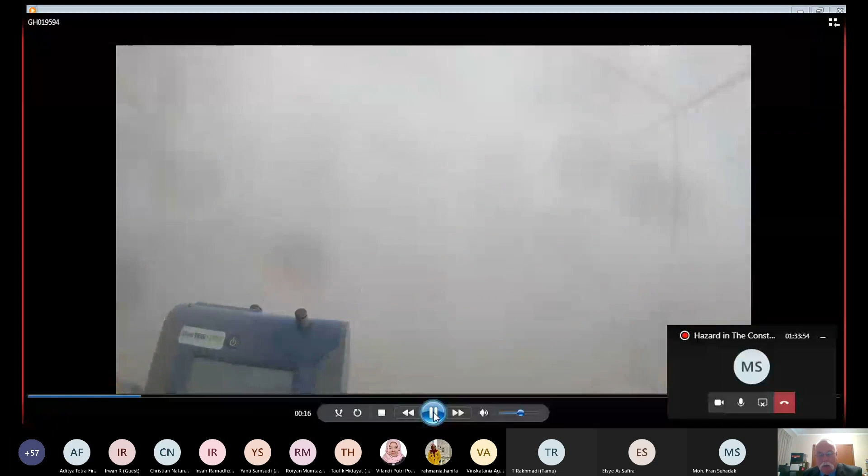You can see the dust build up on the front of his lens already, and that's a DustTrak maxed out at 150 milligrams per cubic metre on respirable dust. That has blown right across the mine site and down into the valley below. Huge amount of dust. Disgraceful.

And yet the regulator has done nothing about it. They would pretend that they're not aware. I'll stop that there. Stop screen sharing.

So look, we have quite significant problems here also. Some of which I'd venture to say there's probably some commonality between problems here and administration and implementation problems. Probably the nature of the problems are different, but the implementation and control—there's probably some similarity between Australia and Indonesia. But there'll also be a myriad of problems you will have there that we won't see here, because of the different nature of the industries you have there.

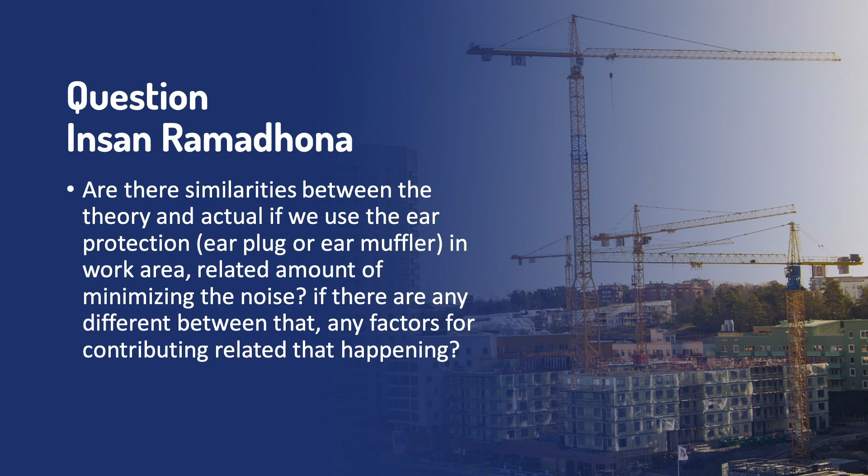Okay, Phil, next question from Pak Insan. He's asking, is there any similarity between the theory and actual if we use ear protection in the work area? I think he's asking about the effective noise reduction rate between theoretical and actual. For example, on the ear plug package they write the NRR is 25 dB—so what is the effective NRR in the actual workplace? So what you're asking is the difference between the theoretical protection and what's actually provided in practice.

Well, I suppose it depends on the class of hearing protector worn. They don't actually provide the attenuation factor, but you can assume it. For class 1, good up to 90 dBA. Class 2, 90 to 95, so you can assume the attenuation has got to be better than 10 dB. All the way up to class 5, which is 105 to 110 dBA, so you'd assume the attenuation has got to be better than 25 dB. However, for all of those, they assume the earplug is correctly fitted and fully into the ear canal, fully blocking it up.

From what I've seen in Australian workplaces, to have earplugs correctly fitted is more rare than to have them not fitted correctly, where they've just shoved them in from the outside and they're poking out like Shrek's ears. So we're on a big campaign here to educate people to correctly fit earplugs. I appreciate that doesn't specifically answer the question, but if you send that across to me, I will speak with our acoustician and ask him to provide a better, fuller answer.

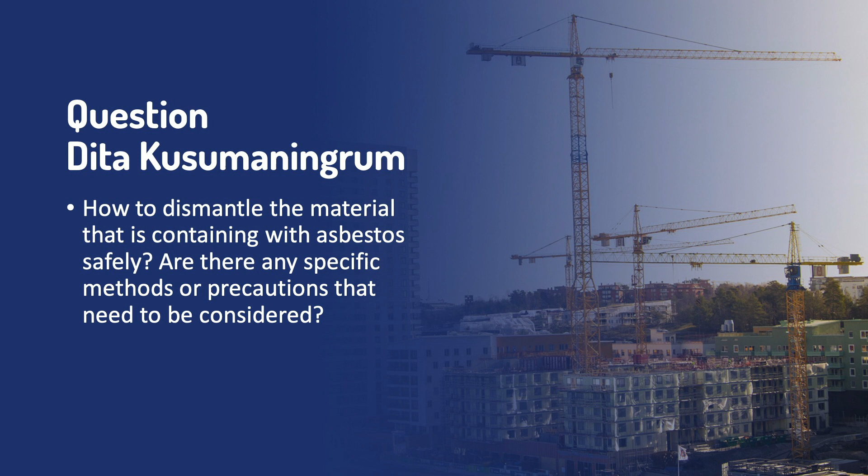To remove or dismantle material containing asbestos safely. I think this one is one of your expertise. I've done it for a long time.

So the question is how to remove or dismantle ACM? Well, that depends on the type of asbestos-containing material it is, whether it's a bonded product or a friable product. Bonded products are far more robust than friable materials and don't release asbestos fibres as easily, so the controls for their removal are a lot less stringent than for friable materials. Friable materials would include things like sprayed products, pipe lagging, and boiler insulation, and that type of material requires far more stringent controls.

I can certainly send some information on that, but essentially what you would do is build a fully sealed, plastic-lined, dust-tight enclosure around the materials to be removed, and fit that enclosure with an extraction ventilation fan that sucks air out through a high-efficiency particulate air filter and ventilates it to the atmosphere. Because it's a dust-tight enclosure, sucking air out lowers the pressure inside with respect to the outside, so if there's a leak, the net effect is that clean air leaks in rather than contaminated air leaking out.

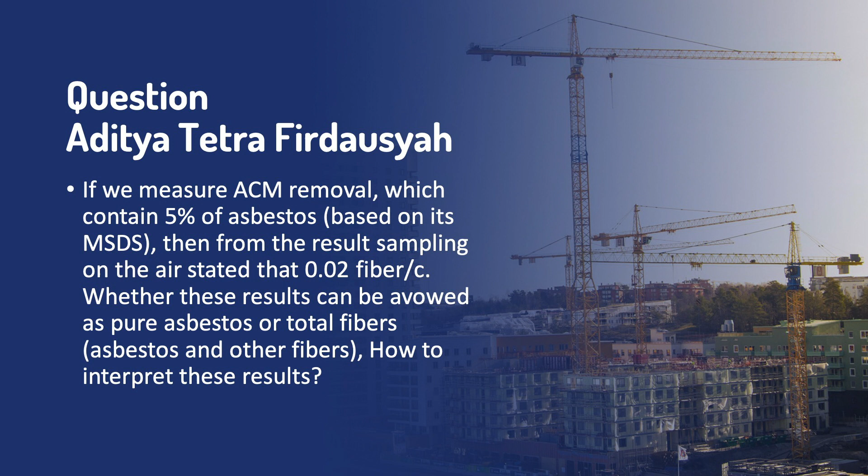From Pak Aditya: if we do ACM removal, the asbestos content in the material is 5% according to the MSDS. And then he did air sampling, and the result is 0.02 fiber per cc. Is this result interpreted as pure asbestos or total fiber, which means that the result contains asbestos fibers and other mineral fibers? All right, okay, sorry if you finished. Yeah, it's finished. Okay, all right.

It depends on the analytical method used. The membrane filter method is an estimate of airborne asbestos fibres. You can either do the analysis by transmission electron microscopy, which is very expensive, but probably 99% of the analysis done in the world outside of the US is done by phase contrast microscopy. Phase contrast microscopy looks at the size and shapes of materials on the filter, and compares it to established size criteria which I gave before. So it counts any shape on the filter that's longer than 5 microns, less than 3 microns in diameter, and has an aspect ratio of greater than 3 to 1.

It counts that as a fibre. It does not have the ability to discern between cleavage fragments on the filter that may be from other mineral particles that may conform to that size criteria, or an asbestos fibre. The single biggest advantage that electron microscopy has over optical microscopy is that if it's fitted with an energy dispersive X-ray analyzer, it can analyse the individual fibres that you look at and look at the chemical composition of it, and see whether it's consistent with one of the asbestos fibre types or not.